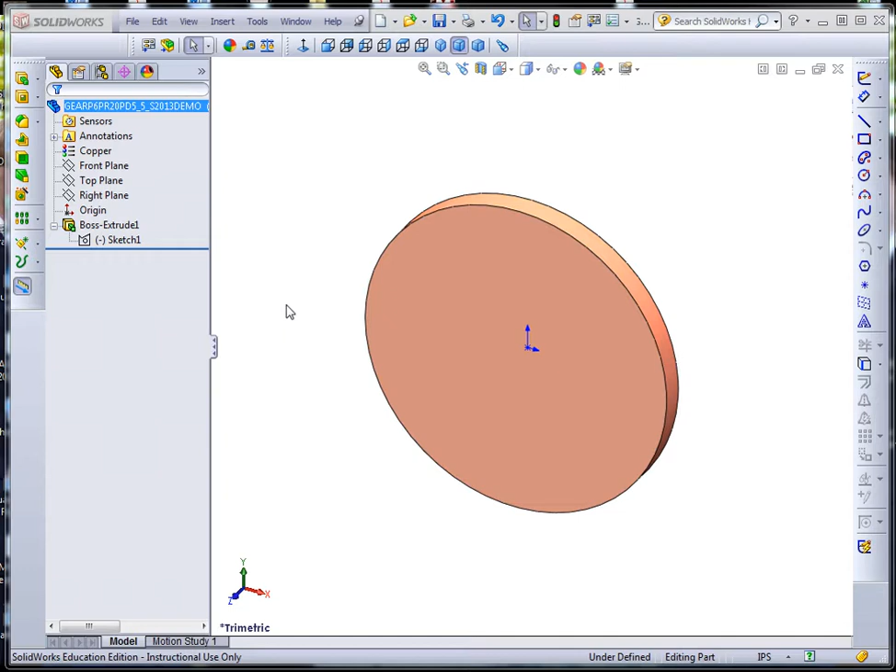This is the 6th video on the creation of the gear using SolidWorks design tables. I'm going to click on the sketch and hit the extrude button, and notice that the select contours window is active. So I'll just come in here and I want to select that tooth, and then we'll just say through all. Okay, so we now have a tooth.

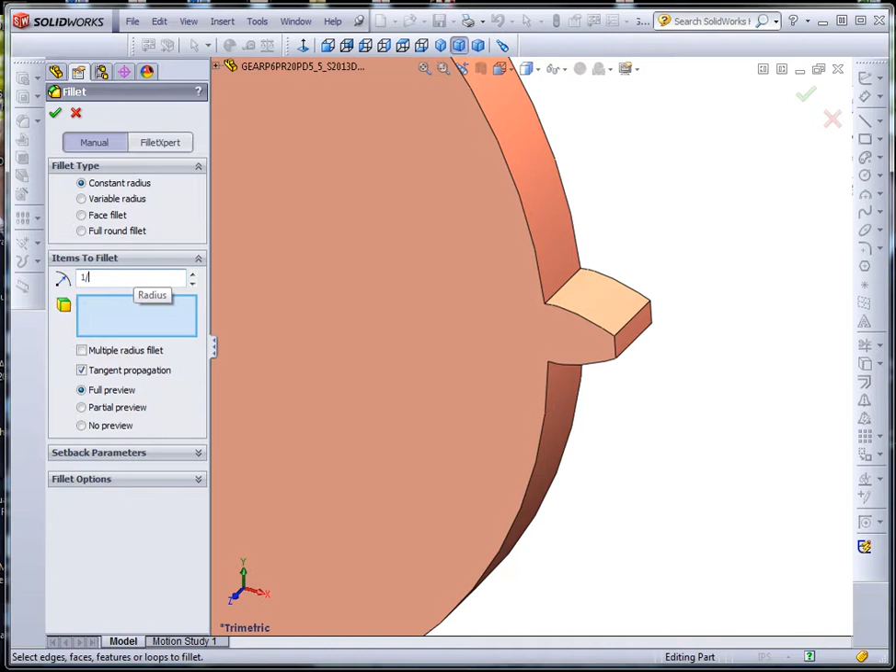We need to put in the fillet. The fillet is going to be 1/16, and make sure you do both sides. So we now have one tooth with fillets,

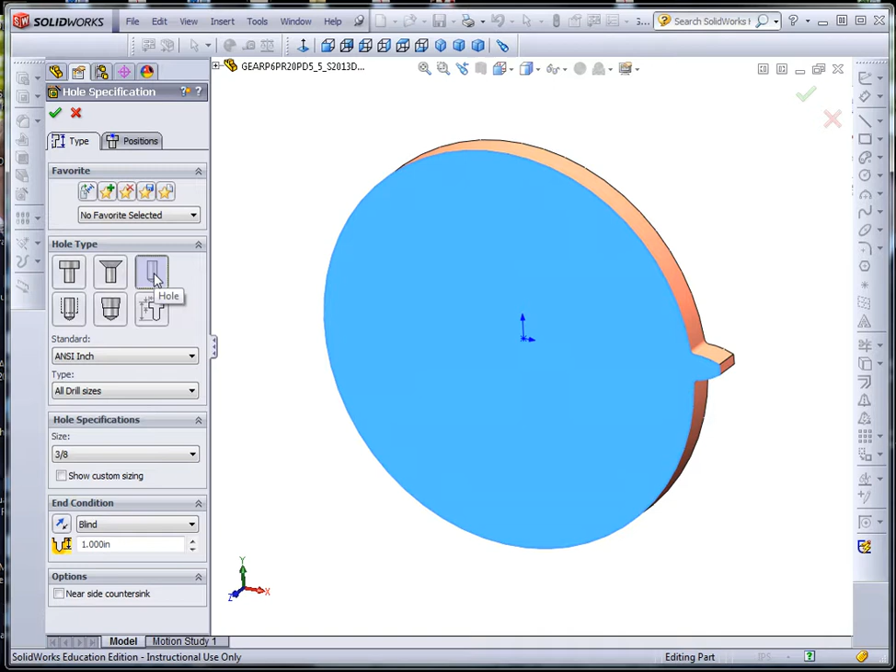and we're going to put in the center hole. So I'm going to just click on that face and hit the hole wizard, and this is just a regular standard drill. The diameter is 3/8. It's going to be a through hole, and the position will just be right at the center there. Okay, so we have the hole.

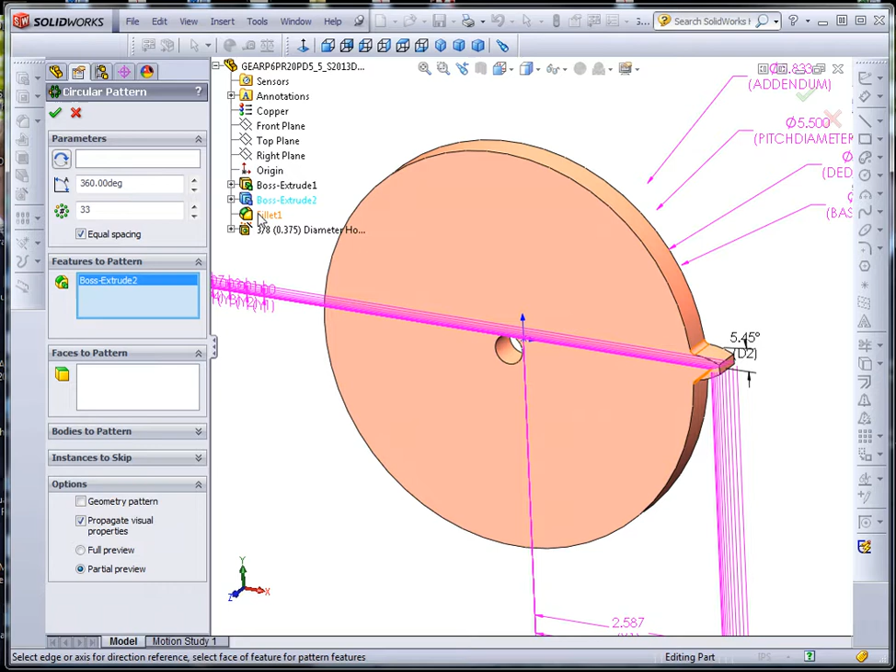Now we can go ahead and do the circular pattern. Features to pattern, we can either pick the tooth, make sure you get the fillet, or we can just grab it from here. There's the tooth, that's the fillet. In terms of the pattern axis, I'm going to click in there and then just click inside that surface, and we want 33 teeth over 360 degrees, equally spaced. So now you can see that the gear is complete.

I'm just going to show you this. If you go to options, under display selection, make sure you have tangent edge removed. If you've selected tangent edge removed and you see some lines here on these teeth, then it's probably because you forgot to put in the tangency constraint between the radial line and the spline. So make sure that you have that. At any rate, now you're all set to actually go ahead and create the drawing.

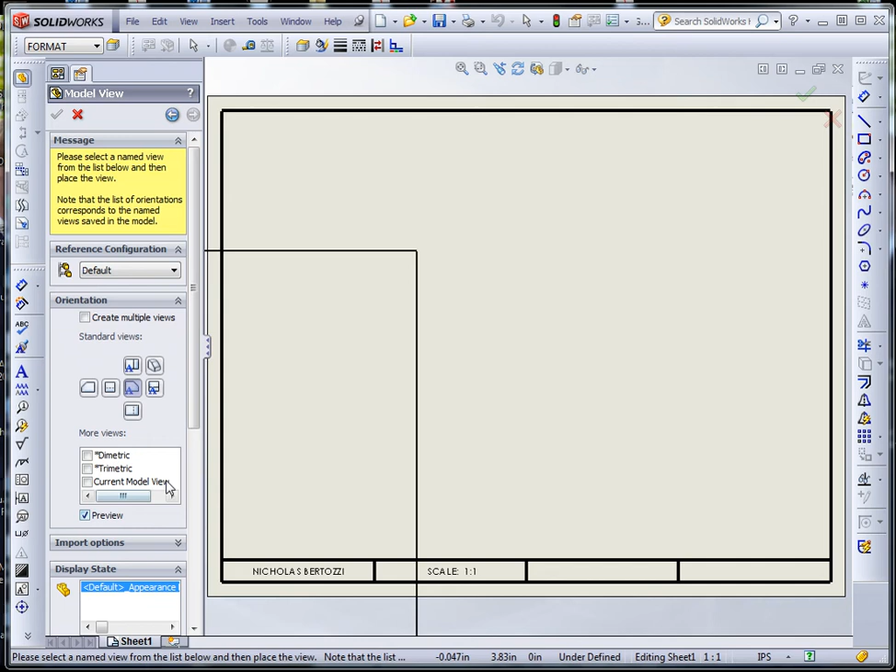So we're going to go ahead and start the drawing. First I'm going to save the part file and then create a drawing file, and so you can go ahead and put that in. Put an isometric in there, and we'll reduce the scale on that to 1:2.

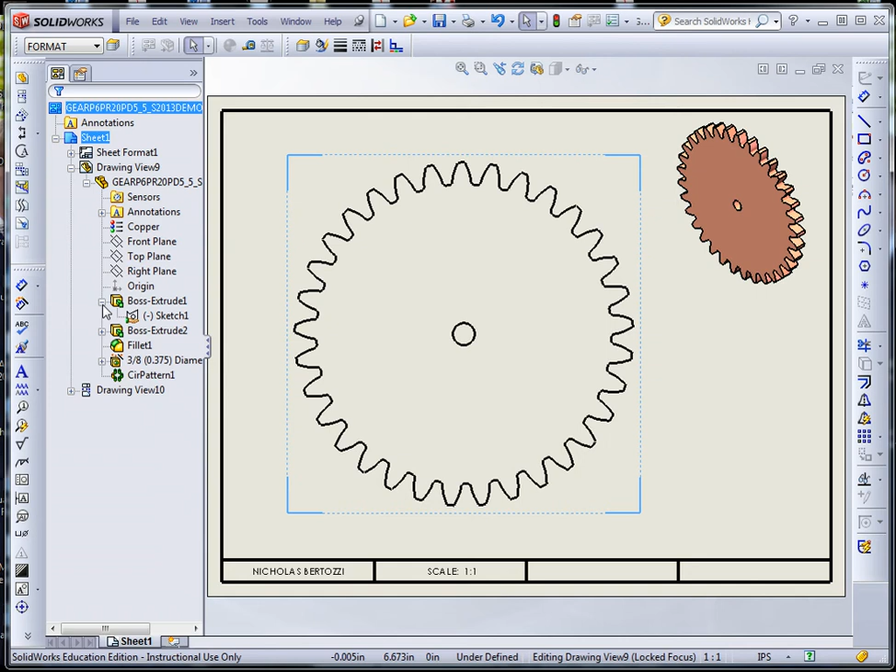So just one thing I want to point out here, in the drawing you will want to show the pitch circle, and an easy way to get the pitch circle is to go back to the part here and click on this sketch and select show. Okay, so now you can actually see the sketch,

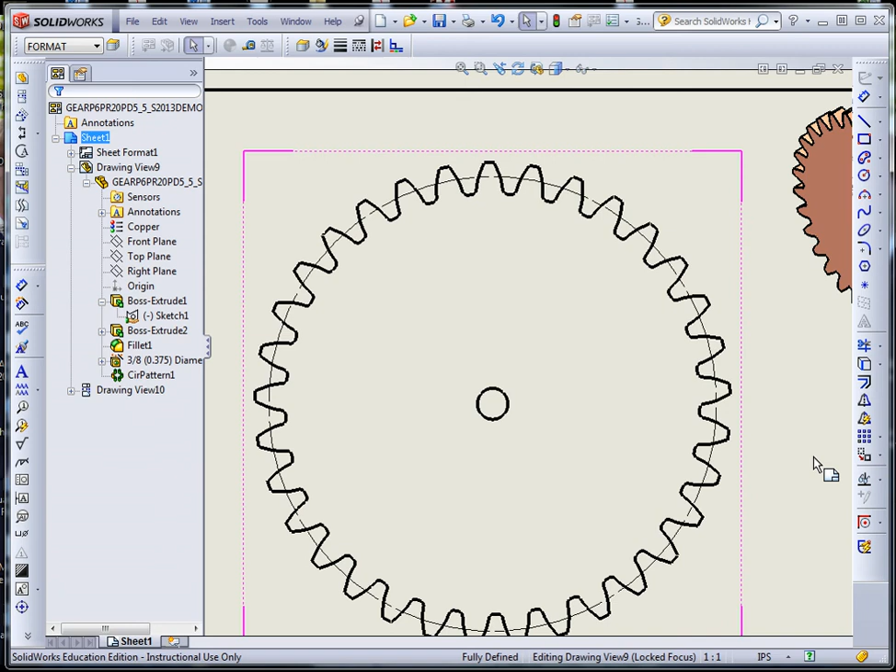and then what we'll do is click on the pitch circle and hit convert entities. Okay, and at this point we'll hide the sketch, we don't need that anymore, and click on that pitch circle and switch that to for construction. Okay, so that gives you the construction circle that shows the pitch circle, which then you can put a diameter on.

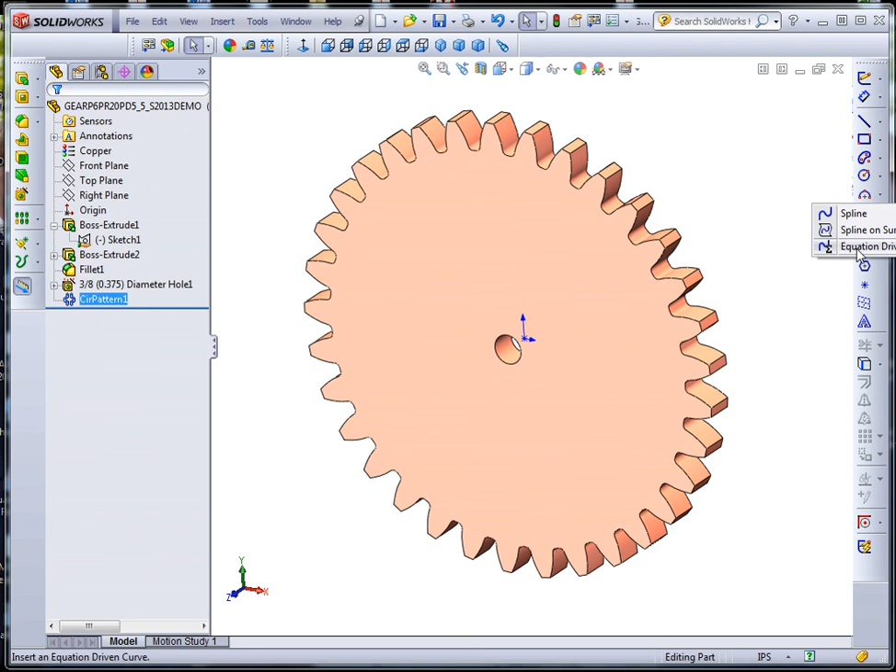So I think that is about all you need at this point. I'm going to do a separate video that shows you how you could actually create this curve with an equation. So SolidWorks, in other words, does give you the capability to do an equation-driven curve. So I'll pick that up in the next video.